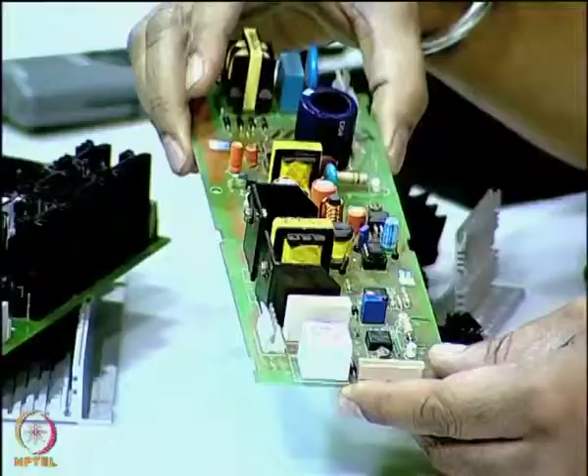If you look at the PCBs, many of the printed wiring boards which have power components in them will have some form of heat sinking done which will remove the heat from the components.

Look at this particular component. This is nothing but an aluminum plate which is bent in the shape of an L. Within, you will see the component here. This is a TO-220 package component mounted on the PCB. The leads are mounted on the PCB right here, and the body is affixed to this aluminum plate which will act as a heat sink. This is a very simple heat sink, but you have different varieties of heat sinks.

For example, take this particular board here, where the heat sinking is by extruded aluminum lengths. These are aluminum extrusions, and inside you will see the components placed. The three leads here which come out are those of the components, and these are used basically to keep the junction temperature of those particular power components cool.

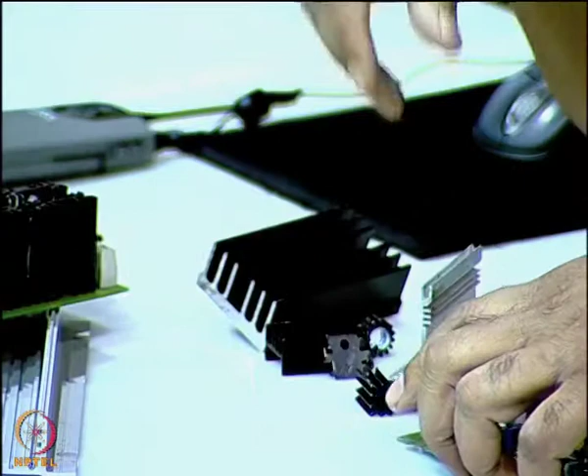You see another type of heat sinking here. Likewise, you have different shapes. You see there is another heat sink which is of a different cross section. This is also aluminum extrusion.

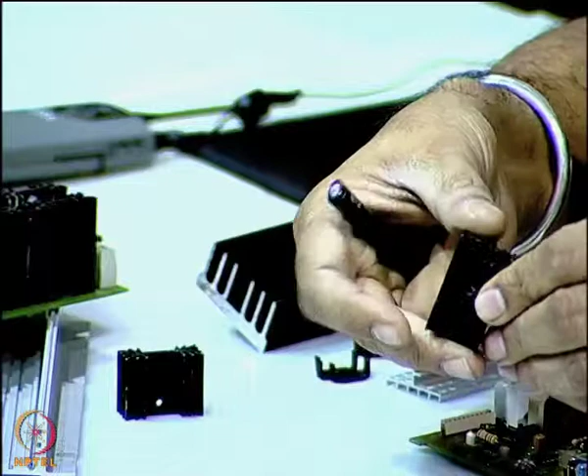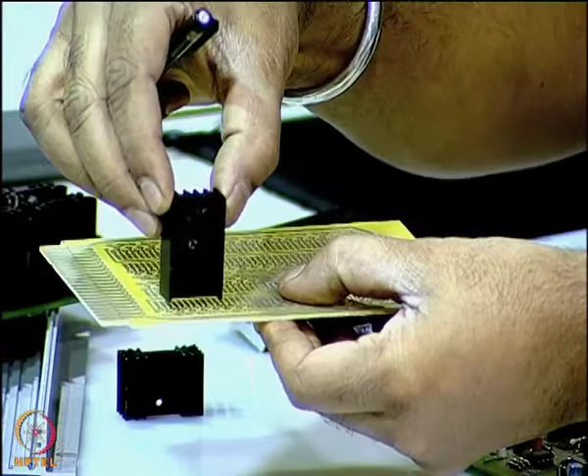Another PCB mountable heat sink. You have a possibility of attaching it to the printed wiring board through a screw, here a mounting hole. The component will be mounted here and onto the PCB, which will probably fit something like this. We mount it in this fashion with the component leads going into the PCB.

You also have this type of cylindrical cross section heat sinks. These are for the TO5 package type of devices which are circular, maybe op amps also, and some BJTs which have a circular cross section like that, and it is fixed around that, and mounted onto the PCB like that. So, like that you have many such heat sinks.

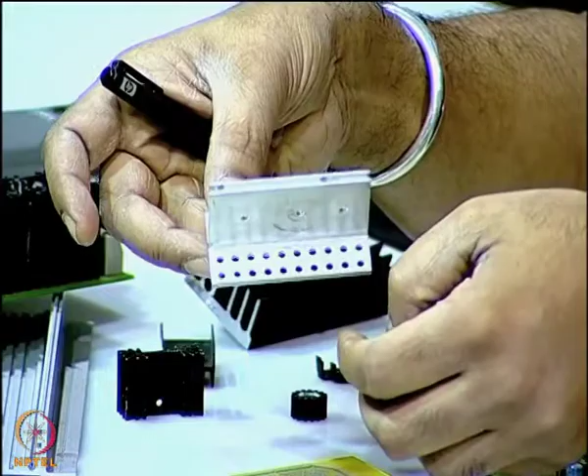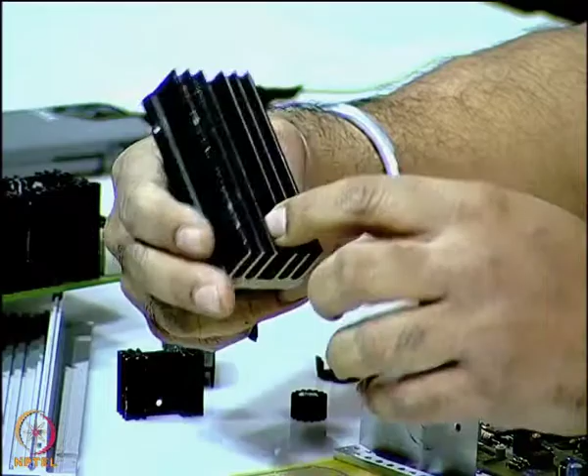This is another type of extrusion piece with components mounted through that. The leads will go in through these holes and onto the PCB. You have another type of a bit heavier heat sink with different cross section here. The components are mounted inside and fixed to the enclosure through these mounting holes. So, you have heat sinks of varying sizes, still further bigger ones, depending upon the type of heat that has to be removed from the junction.

So the culprit, of course, is where the heat source is actually at the semiconductor junction, and the semiconductor junction is the source of heat, which is coming as a consequence of current flowing through it and a potential across it.

And therefore, today's main discussion is on the thermal aspects. This is what we will be talking on, and the junction temperature in most of the semiconductor devices that you will be using would have an upper limit of 150 degrees centigrade. This is actually the breaking point. You should never go to that, and almost all the designs will see to it that the junction temperature is less than 120 degrees centigrade.

It should not go beyond that, even at an ambient temperature of 50 degrees centigrade. So, these are some numbers that you need to keep in mind, and normally the designs are performed for these extreme numbers.

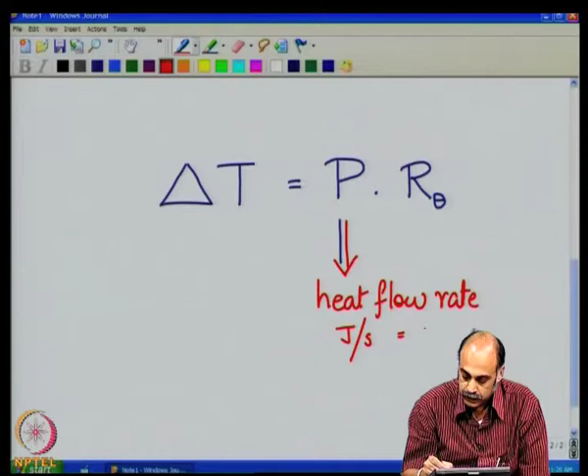So heat flow rate is nothing but the power dissipated within that particular component. And you have another parameter which comes here, which is the property of the material, and this is called the thermal resistance.

Thermal resistance is not actually the resistance like in the electrical sense. It is not a dissipator. It is only going to impede the flow of heat. It is a measure of the speed with which the heat can be conducted away, can be removed away from the hot source. So this is to be construed, this needs to be understood in that fashion. The thermal resistance here just means the speed at which the heat can be removed from the hot source.

Now this equation is the governing equation, and for electrical engineers they say that this is something equivalent to Ohm's law, as we know in electrical engineering, V which is equal to I into R, something similar to that, but not exactly the same.

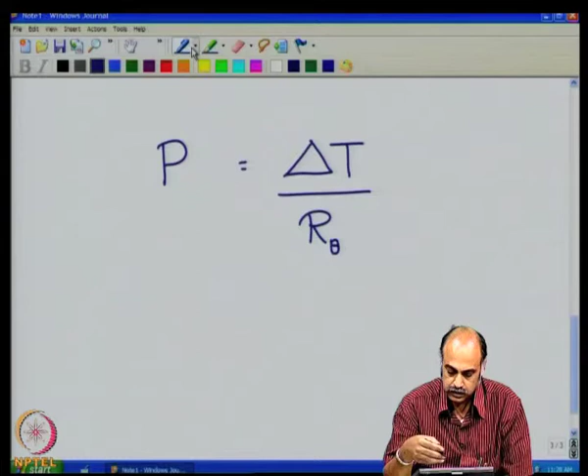Now this form is a very generic form, but there are many derived forms, and many literature give this law in different notations and different forms. In order to avoid confusion, let us have a look at the various notations that are there in the literature. They are actually the same thing expressed in a slightly different manner.

Now firstly, power sometimes is expressed with respect to unit cross section area, power per unit cross sectional area given in this fashion, A R theta. Now what is A? If you have a square block like this, a solid piece of block, and let us say this is the hotter side T H, this is the colder side T C, and the heat is flowing from this hotter side to the colder side in this fashion.

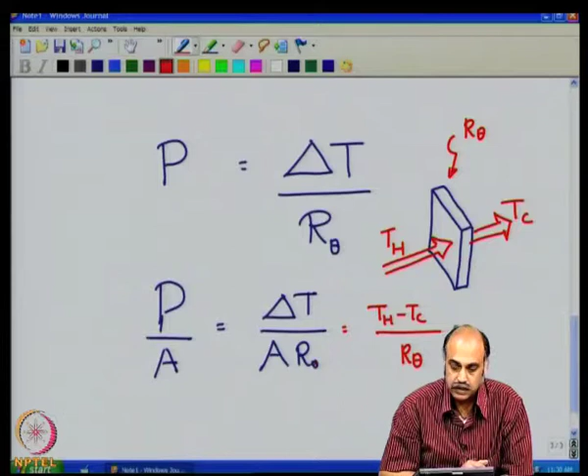So delta T is nothing but T H minus T C, and R thermal, which is the property of this material which is being used. It has an impedance which resists the flow of heat. Good conductors of electricity in many cases are good conductors of heat too. Now this particular solid, let us say, has a cross sectional area perpendicular to the heat flow, and that is A.

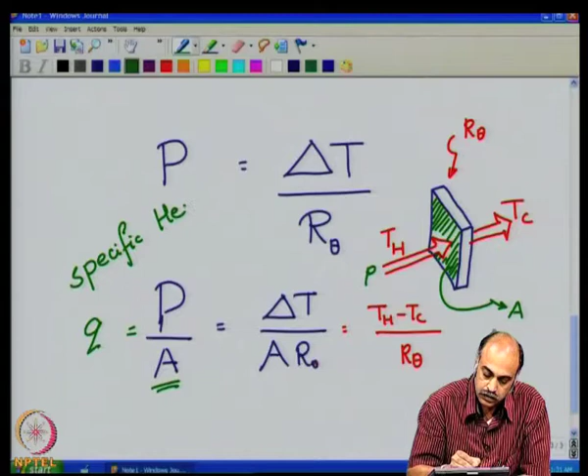Now that is the A that we are saying power by the cross sectional area is called Q. This is called specific heat flow rate. Q is nothing but the specific heat flow rate, watts per meter square, that is its units.

So this is one way of expressing P is equal to delta T by R theta. You have Q which is equal to P by A, which is equal to delta T by A R theta. Now this A R theta is given a different symbology in many literature, lowercase r theta. So it is written as delta T by r theta.

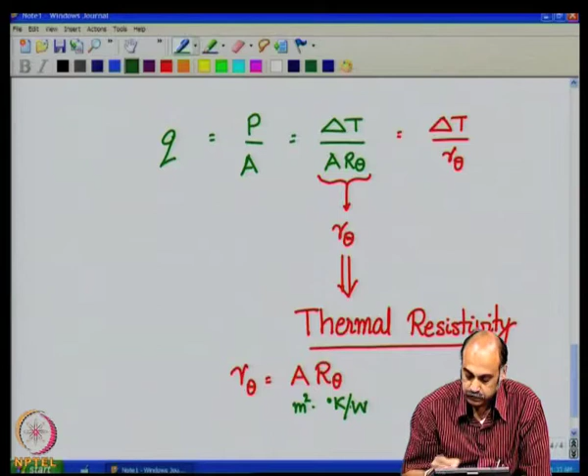Now what is this r theta? This is called thermal resistivity. So we had R, which is the thermal resistance, and you have lowercase r theta, which is called thermal resistivity, which is given by this relation A into thermal resistance. So you have the units for this, meter square into degree Kelvin per watt. So thermal resistivity is expressed in the units degree Kelvin meter square per watt.

Okay, so this is one way of looking at it. So what do we have? We have Q, the specific heat flow rate, which is given by heat flow rate by the area of cross section perpendicular to the heat flow, which is given by delta T by A R theta, which is given by delta T by lowercase r theta, called the thermal resistivity.

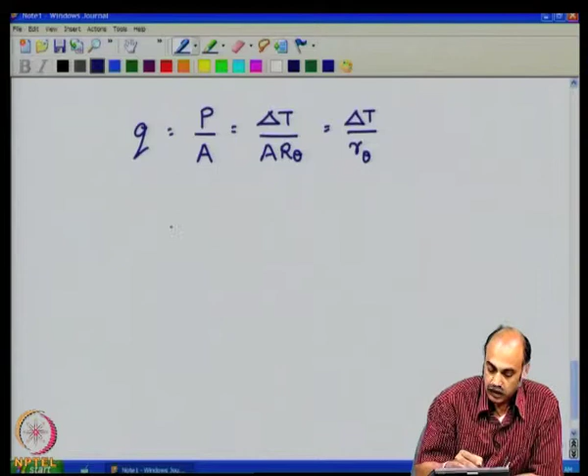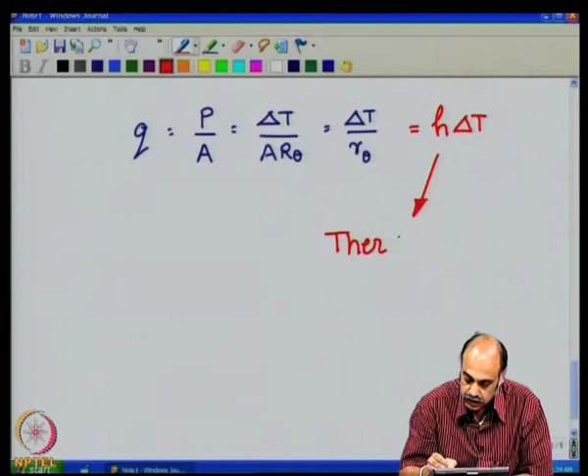Now to this there is a different notation, it is equal to H delta T. Now H is another constant used in many literature, and this is called the thermal coefficient.

H is called the thermal coefficient. It is nothing but 1 by lowercase r theta, 1 by thermal resistivity. We know that thermal resistivity has units of degree Kelvin meter square per watt. So thermal coefficient will be watt per degree Kelvin per meter square.

So this is another way of expressing the same heat flow equation relationship. There is one more way of expressing the heat flow relationship.

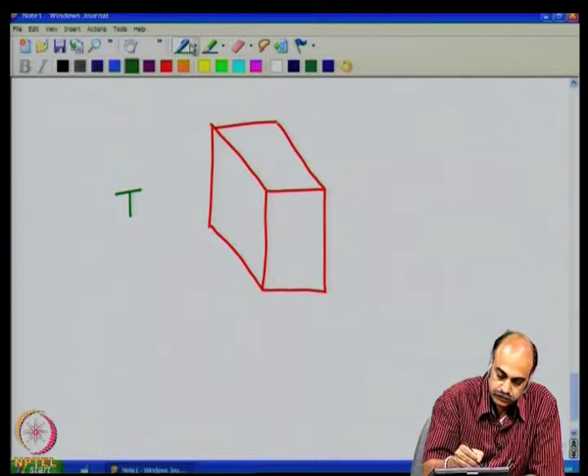Let us take up a similar kind of situation where you have a block, and this block has a temperature, we will call it T1, the hotter side, and heat flows in this fashion. The area of cross section perpendicular to the flow of heat, we shall call that as A, and the thickness of the block we will call it as delta x. Heat is flowing to the colder side, and we call that one T2.

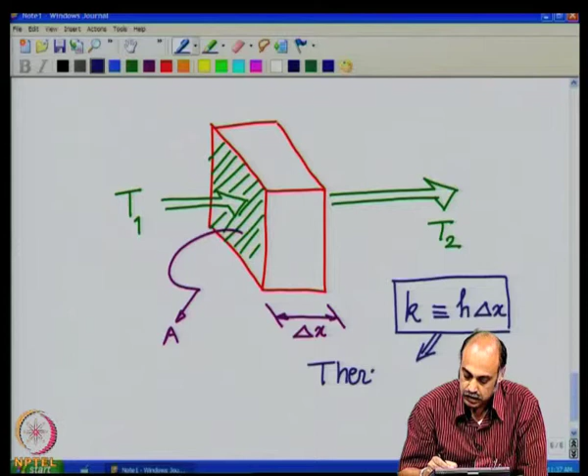Now the property of the block, which normally we express in terms of thermal resistance, thermal resistivity, or even the thermal coefficient H, we have one more constant K, which defines the property of the material, and this is defined in terms of thermal coefficient H and delta x. This is the definition, and this is called in the literature as thermal conductivity. This is also a very popular notation, thermal conductivity, which is used in many literature, and this in fact gives the nicely famous heat equation form.

So if you take the thermal conductivity K, which is expressed as H delta x, and we know that the units of H is watt per degree Kelvin per meter square, but there is a delta x in the numerator, so it will become per meter. So thermal conductivity has units of watt per degree Kelvin per meter.

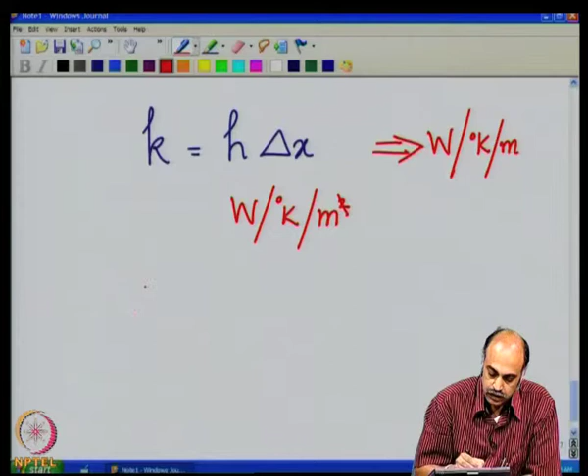So now going back to the equation, specific heat flow rate given by P by A, which is equal to H delta T, thermal coefficient into the temperature difference. Now this temperature difference is nothing but T1 minus T2 in the case we just described. And if you want to make use of this thermal conductivity equation, H can be written as K by delta x into delta T, and this is nothing but K delta T by delta x.

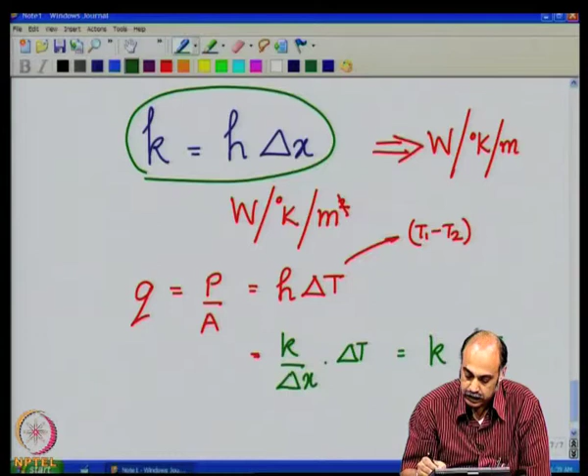And therefore you have Q, which is equal to P by A, which is equal to K delta T by delta x. So this is the famous heat flow equation, which is also written in this form to have a continuous temperature gradient with respect to the distance through the solid. So this is a very popular expression used in many literature.

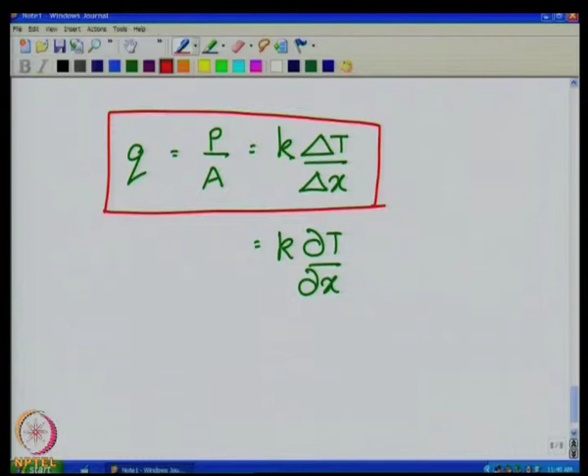So you should be aware of these things. You saw that the same notation was used in different forms. Let us just summarize so that you do not get confused at this point. We started with...

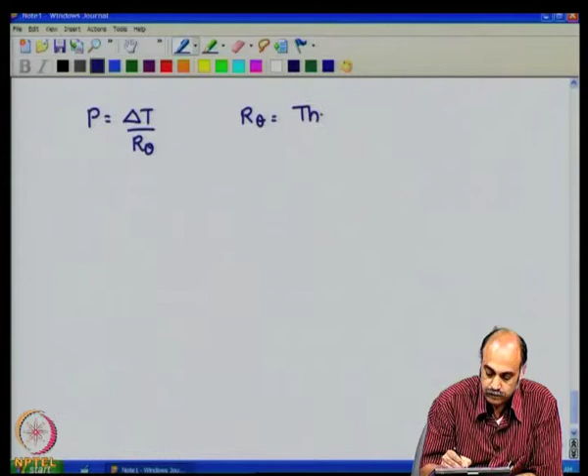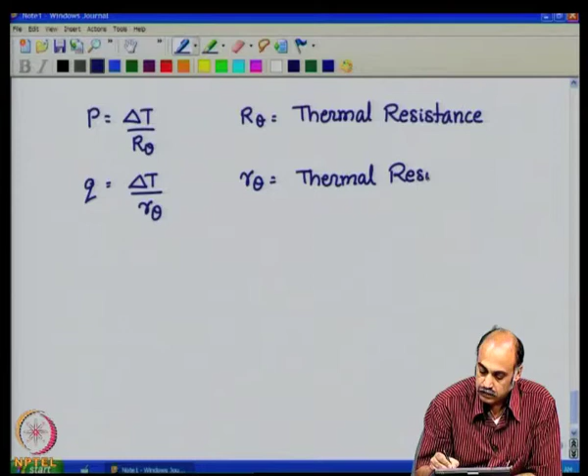P, which is equal to delta T by R thermal. Now this R thermal is called the thermal resistance. You have Q, which is equal to delta T by lowercase r theta, where r theta is the thermal resistivity. You have another form, Q, which is equal to H delta T, where H is called the thermal coefficient. And you had the other form, Q, which is equal to K delta T by delta x, where K is called the thermal conductivity. So these are the four forms that are very popular in the literature.

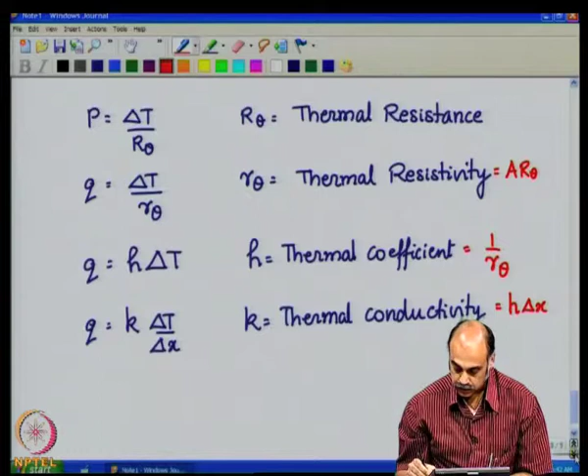You will see these forms are one and the same, except that the notations are slightly different, and you should not get confused when you see one of the forms. You can always convert one form to another. You see that this is nothing but A R theta, this is nothing but 1 by thermal resistivity, and this is nothing but thermal coefficient into delta x. So this is the basic relationship of heat flow rate, heat flow energy, temperature difference or temperature gradient, and the material property.

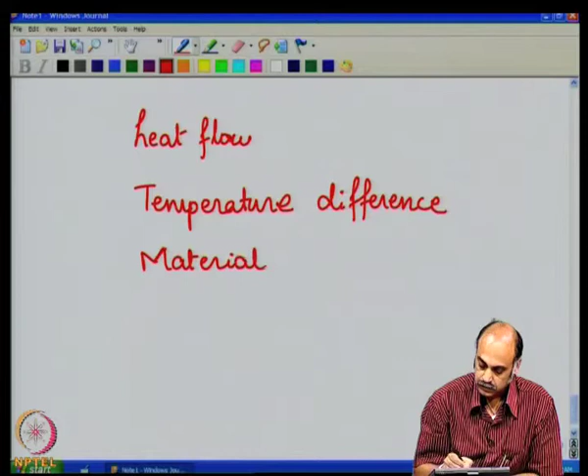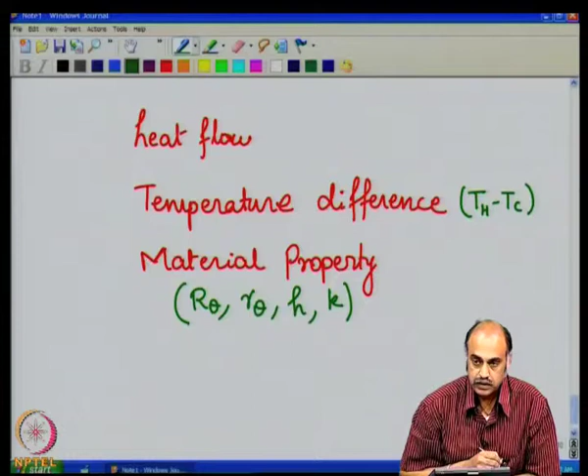So, the material property is the one which is actually represented by these thermal resistance, thermal resistivity, thermal conductivity and such. These are measurable quantities. This is the potential, temperature of the hot minus temperature of the cold, the two points where the heat flow occurs.

Now, the heat flow rate is nothing but the power flow, the power that is dissipated within the semiconductor. This power comes from the electrical circuit equivalent analysis. So, you know the currents flowing through the various components, you know the voltage across the various components, then you should be able to derive the power that is getting dissipated within the semiconductor junction, in the diodes, in the BJTs, in the MOSFETs, or within the ICs, or the magnetic components, or even in the capacitances and the inductances. Once you know the power that is dissipated, then it is a matter of getting it into the thermal domain and relating it with the material properties in this fashion.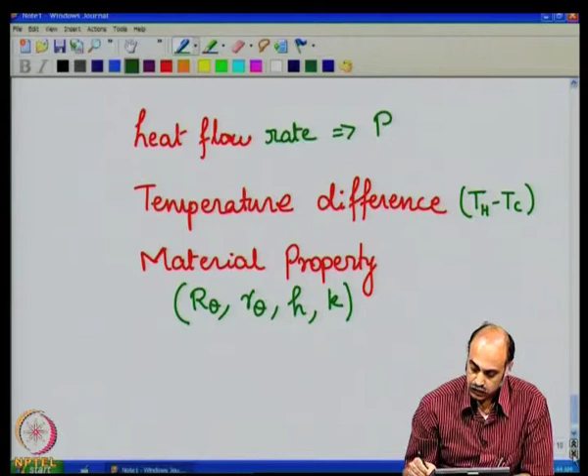So, heat removal methods. Our main motivation for this topic here now is that there is dissipation occurring within the components, and we want to remove the heat so that we can keep the junction of the components cool enough and working reliably.

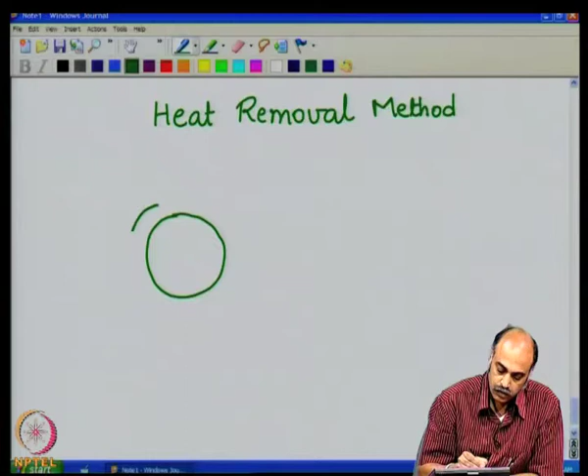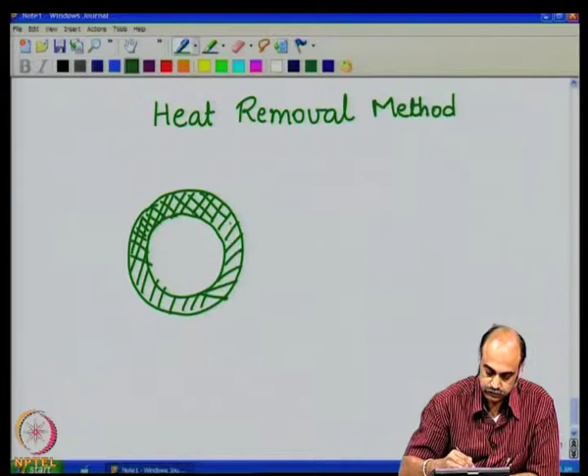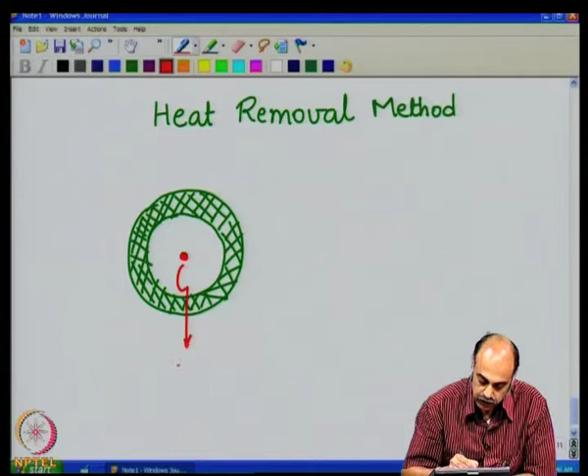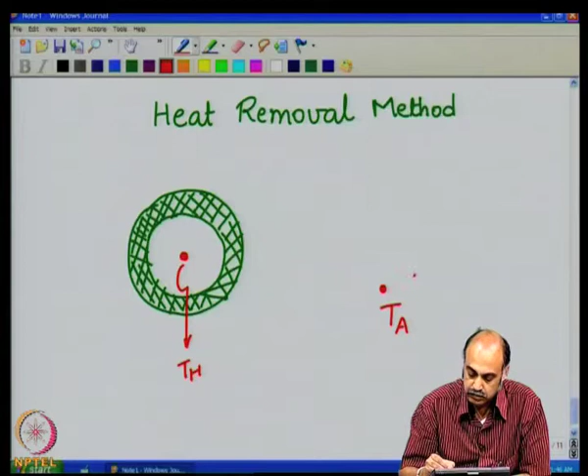If you take for example a closed space, having an enclosure, a solid enclosure as shown like this, and this solid enclosure contains a hot spot shown in red, and that is the highest temperature point in this system, let us say TH. Now, this heat source should ultimately get conducted to the ambient. Let us say this is TA, ambient. Let us say the ambient is around 50 degree centigrade, and this is much greater, around 120 degree centigrade.

Now, what all can happen? The heat energy needs to reach the inner surface of the solid, and it can reach in all directions. The inner surface of this particular enclosure is at some temperature, T surface inner, and the heat is to be conducted from this inner surface to the outer surface, in all directions. So, I am showing these wiggly arrows to indicate the heat flow, and the temperature at the outer surface we will call TSO, T surface outer temperature.

And from this outer temperature, the heat is supposed to go out to the ambient in all directions. So, this is the typical way the heat flow happens.

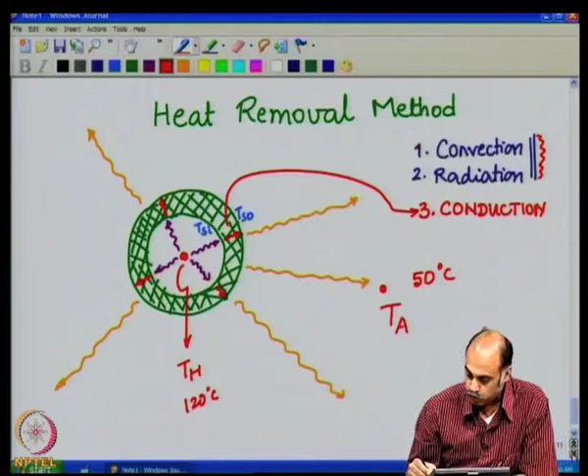So, we do not have too many methods to deal with. You have just 3 plus 1, I will say what is that plus 1. Heat flow within solids, we call it conduction.

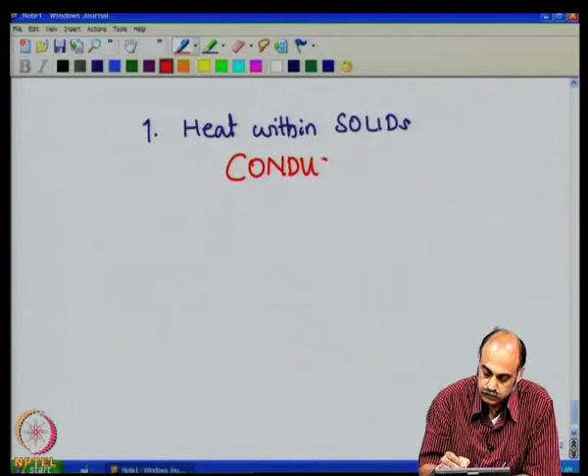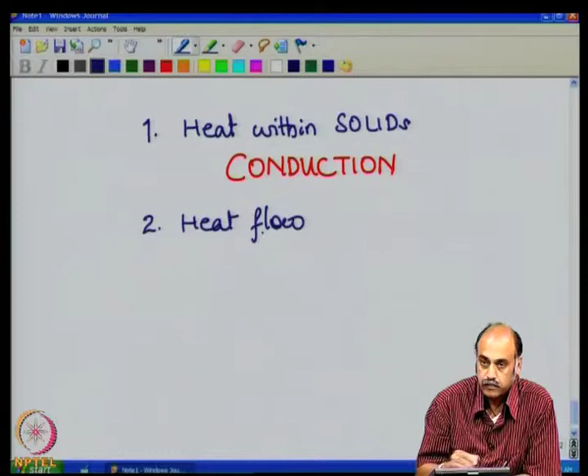Heat flow at the solid fluid interface, we call it convection. So, for convection you need to have a fluid which is interfacing with the solid, so that the fluid is the actual medium which is removing or conducting the heat away.

And the third method, heat flow without a medium, through radiation, this is called radiation.

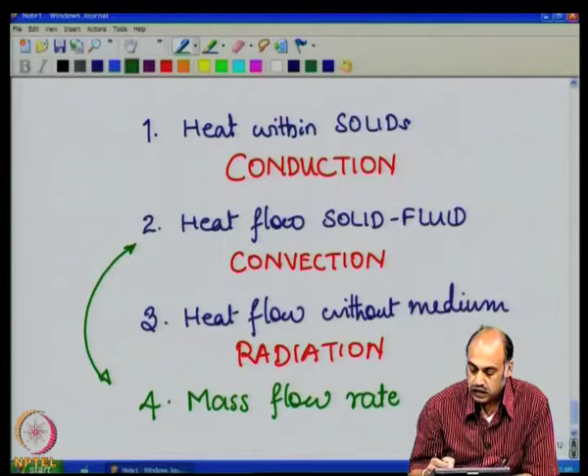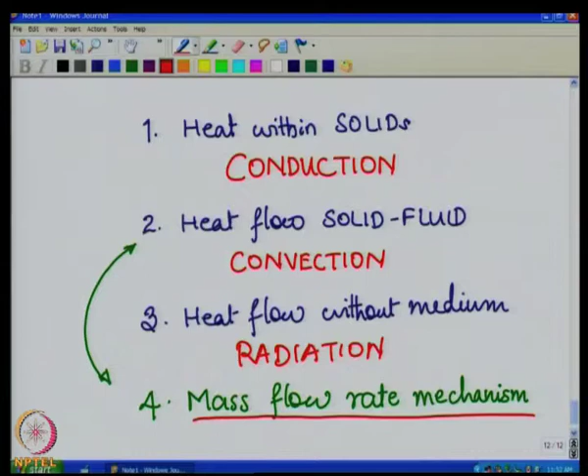There is one more method, I shall put that one in green. It is also in some way linked with convection. It is also a solid fluid interface. This is called mass flow rate, heat transfer through the mass flow rate mechanism. In convection, the fluid flow is not tightly controlled or regulated, whereas in the mass flow rate mechanism the fluid flow is tightly regulated, and therefore you have this as a separate mechanism, part of the convection mechanism, and we call that one the mass flow rate mechanism.

So, these are the 4 basic types of methods that are used for conducting the heat away from the junction. So, now coming to the methods by which you try to remove the heat away.

Let me show some scenarios which will give you the basic idea. Probably first a simple explanation with conduction.

So let us take an example where we are trying to conduct the heat from the semiconductor to the ambient. Let us say we have some solid material where this portion is the hot portion, at temperature Th, and this portion is the cold portion, at temperature Tc. The heat will flow from the hot to the cold in this manner.

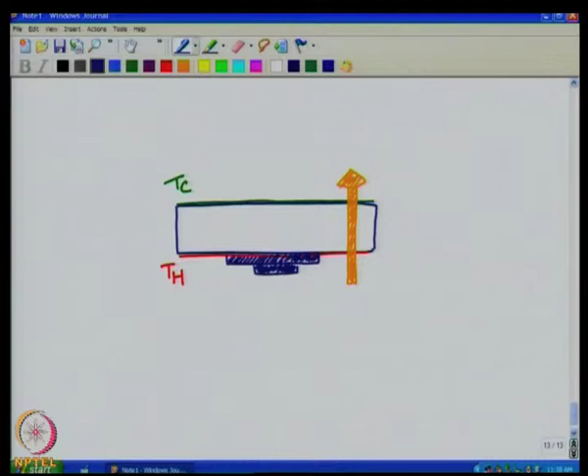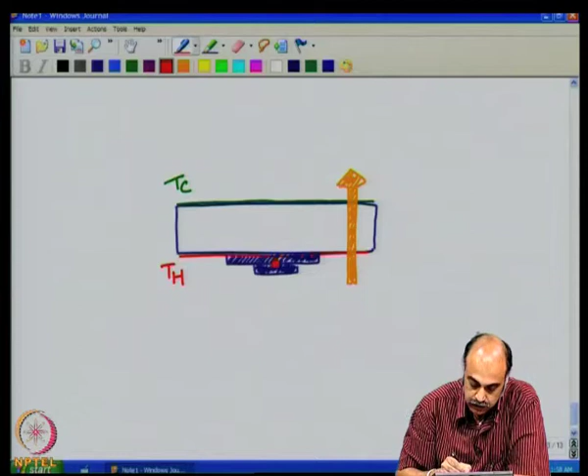Now if you look at these components here in this PCB, you see that this component is fixed to this aluminum plate here. So the hot spot is within this component at the junction, and that has to be removed out to the ambient. So here this component has a hot spot right in, and that is called the junction temperature Tj.

Now let me erase this portion, these symbols, and make way for new symbols. The heat flows from the junction, the hot spot, to the case, the surrounding case. The surrounding case, the blue colored one, is at temperature Tc, which is lower than the junction.

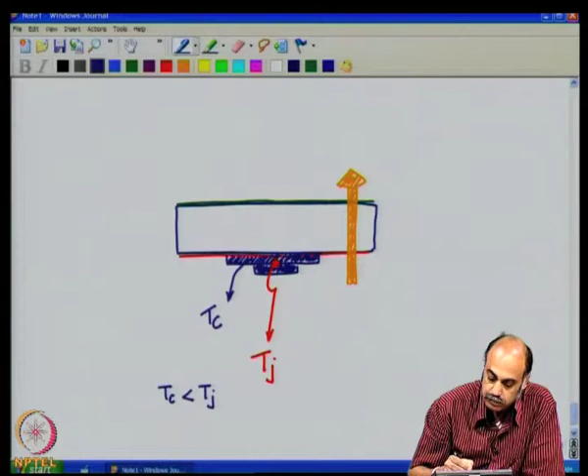And from there the power flows on to the heat sink, which is the bottom portion of the heat sink as shown here. Now there is a temperature gradient. You will see that heat starts flowing from the bottom to the top as shown.

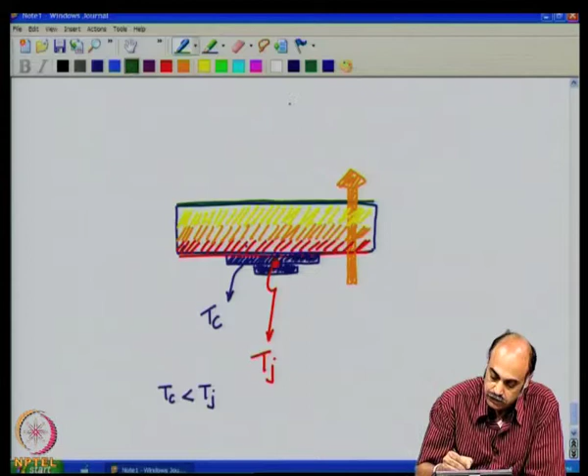And somewhere here we will say is the ambient, which is at around 50 degrees centigrade. So the junction is at around 120 degrees centigrade, and we want the heat to flow in this fashion.

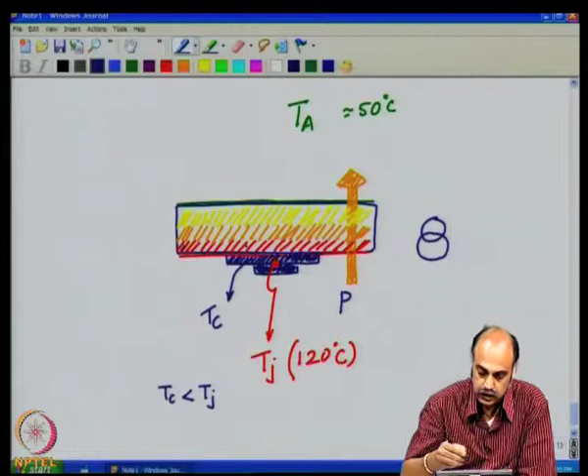Now how do we model this? The power flow P is modeled as a current source like this. I will reposition things in a slightly different way. It is modeled as a power source like that.

Now this power source is basically the dissipation which is happening within the junction. The power source generated at the junction is at junction temperature with respect to ambient, T amb.

Now there is a thermal resistance between junction and the case. So this is the junction, this is the case, and this results in a temperature Tc at the case, slightly lesser, due to the presence of a thermal resistance R theta junction to case, R theta Jc, let us say.

Then from the case, the component is attached to the aluminum block or heat sink block through a compound called heat sink compound, which is supposed to make proper contact with the surface of the heat sink. So that also is going to bring about a thermal impedance from case to sink, giving rise to another thermal resistance, case to sink.

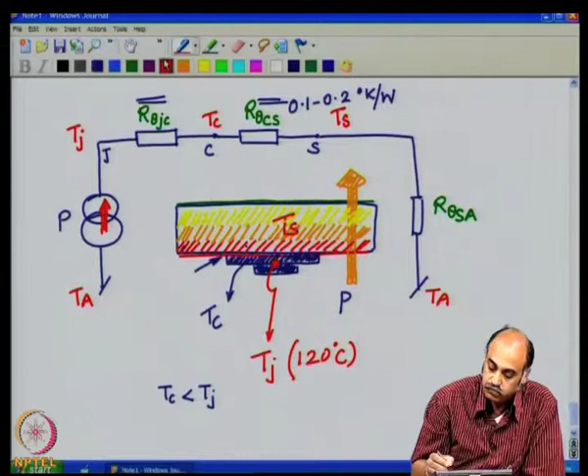Generally, we need to find out what this is, so that you can buy from the market a suitable heat sink of suitable extrusion and cross section, such that the R thermal sink to ambient is as required.

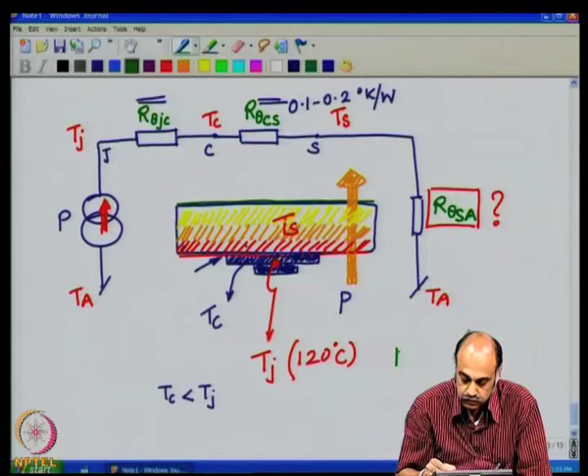So what is the governing equation? We know that P equals delta T by R thermal. This is our basic governing equation.

Now let us reframe this equation in this following manner: R thermal is equal to delta T by P, or we should say delta T is nothing but Tj, junction temperature, minus TA, the ambient temperature, divided by P.

Is the total thermal resistance which you see in this whole link from Tj to TA. So what is it? That is equal to R theta junction to case plus R theta case to sink plus R theta sink to ambient.

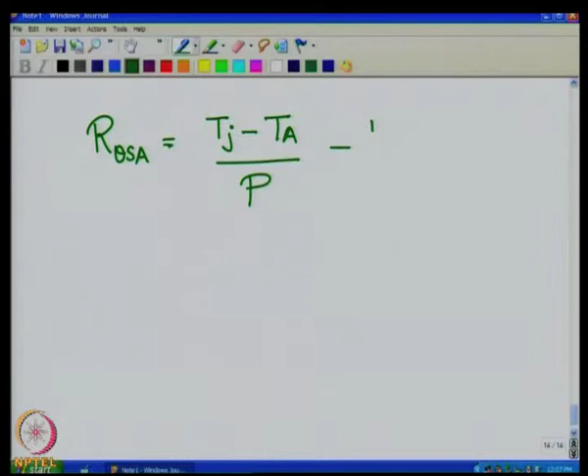So, this can be rewritten in the following manner: R theta sink to ambient. This is what you normally would need to buy from the market, given by T junction temperature minus T ambient temperature, divided by the heat power flow rate, minus R theta junction to case, minus R theta case to sink. This would be the governing equation by which you go and buy a particular heat sink.

So, T j is the junction temperature, and for most semiconductors it is 150 degrees centigrade max, and normally we do not allow it to go more than 120 degrees centigrade.

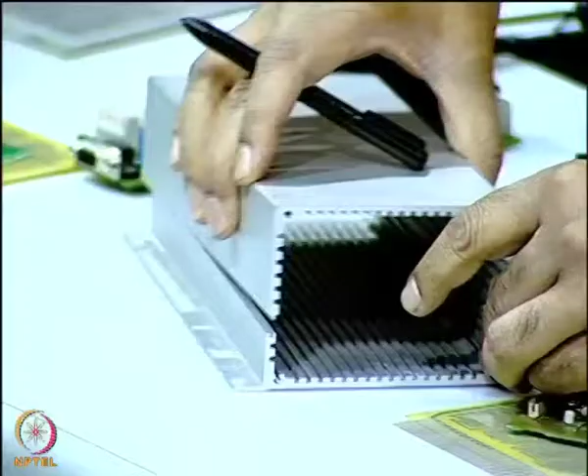T ambient, this is not the room temperature. Keep that in mind, this is not the room temperature. This is the temperature in the immediate neighborhood of the heat sink. So, if you have an enclosure like this, let us say you have an enclosure, and this heat sink, this particular card is supposed to fit into this enclosure like this. Let me fix this. So, let us say this is going to fit like this. It is not, T A does not mean the temperature of the room surrounding this enclosure. It is the temperature in the immediate neighborhood of the component of the heat sink within the enclosure, which will be at a higher temperature than the room temperature when all these enclosures are closed and packed.

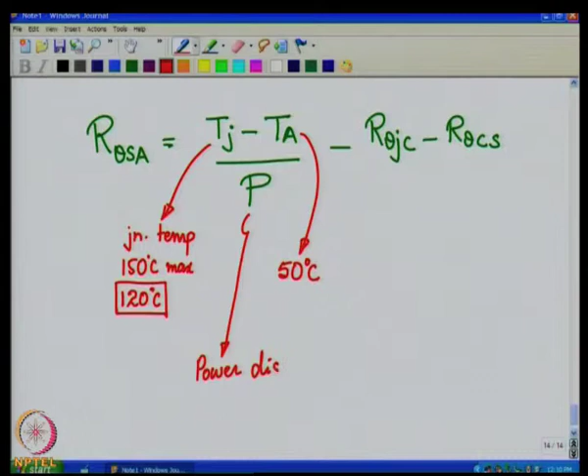So, this is the temperature which should normally be designed for around 50 degrees centigrade, much higher than the room temperature, and this P is the power dissipation within the component. This is calculated from circuit analysis.

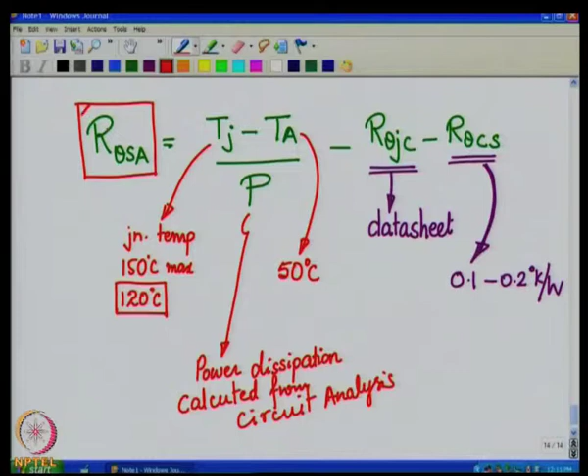This portion, R theta junction to case, for that specific component, you can get from the data sheet of the component. The electrical data sheet will give R theta junction to case. This depends upon the quality of the contact made by the component with the heat sink, and it varies by around 0.1 to 0.2 degree Kelvin per watt. So, knowing all this, one can calculate this and from the market get the heat sink according to the thermal resistance requirement of sink to ambient, and connect it to the component.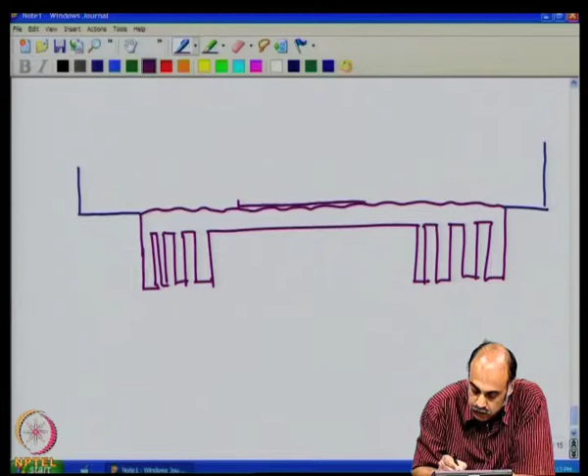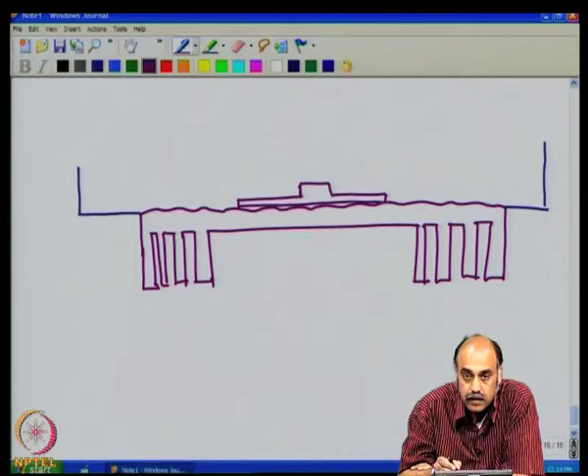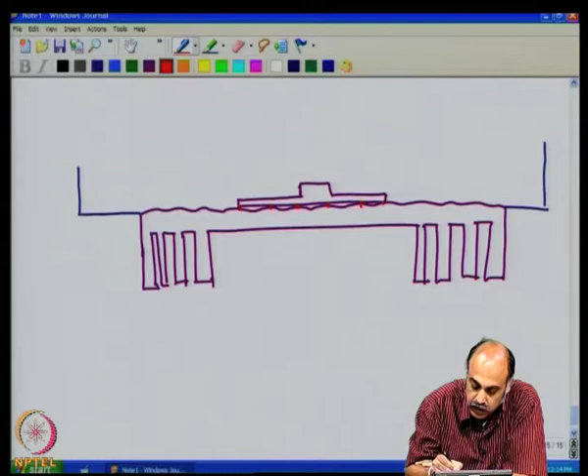Now, what is crucial is if you zoom in to the surface here, let me remove that. The surface is not actually smooth, it is very jagged. So, this is an extremely zoomed case, and on that if you mount the component, you will see that these micro hills will actually make point contact. It will only make point contact with the component, and therefore the contact will not be good, and as a result R theta CS will deteriorate, meaning thermal resistance will become high.

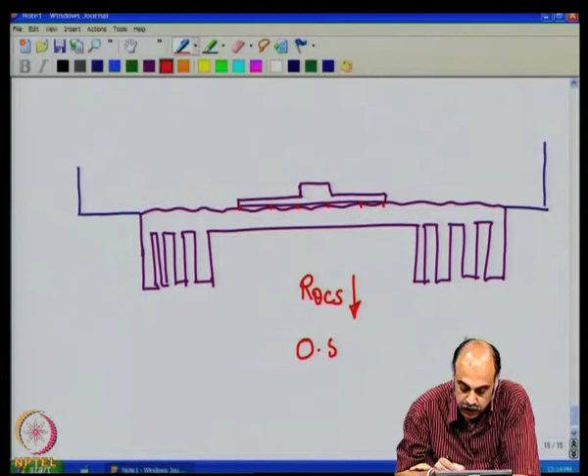It can go even as high as between 0.5 degree Kelvin per watt to 1.5 degree Kelvin per watt. This is a poorly fixed component to the heat sink.

Therefore, what is normally done to improve the contact is one has to apply a paste which just fills these valleys within the hills. You should not apply too much paste, otherwise you will have a thick layer of paste above the valleys, and again it will deteriorate the contact thermal resistance. You have to apply just enough paste to fill the valleys and make very good contact between the component and the heat sink. These valleys are filled with a paste called heat sink compound, which is a thermally conductive paste.

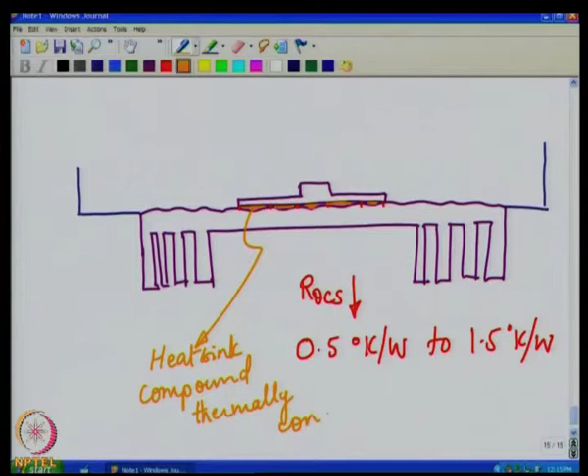And that has to be done, it is mandatory if you have to get a good case to sink thermal resistance. So, this is the way that the components will be mounted and the heat sink will be used for removing the heat.

In power electronic components, you should note there is one more issue. The heat that can normally be removed by a natural process, without forcing the fluid flow, is limited, and therefore we may have to apply forced cooling in some high power equipments, in which case fans are used.

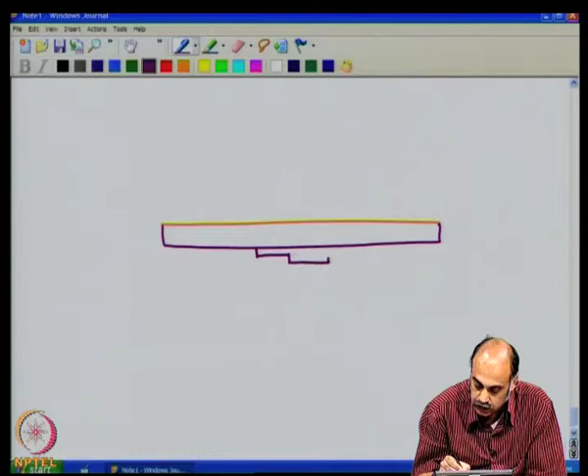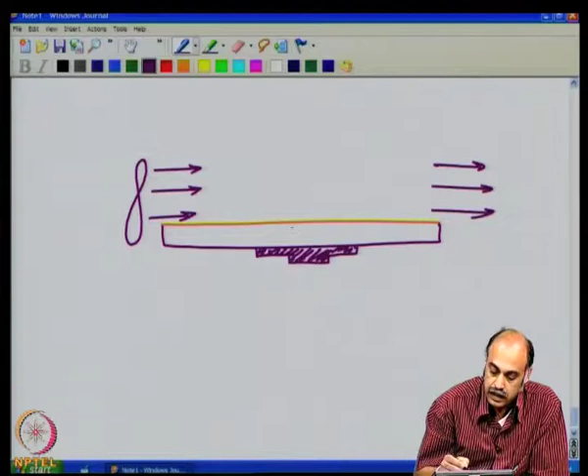So, you must note that if you have a heat sink surface like this, let me show it as a surface like this, and let us say you have mounted a component in this fashion. A fan is also mounted, which will give forced airflow through the top of the surface, and this forced air cooling will give much better thermal resistance. It will lower the thermal resistance drastically and remove the heat away from this component, with the hot spot here, at a much more rapid rate.

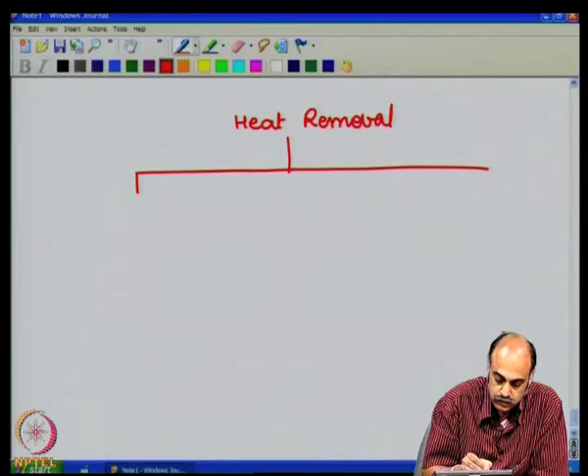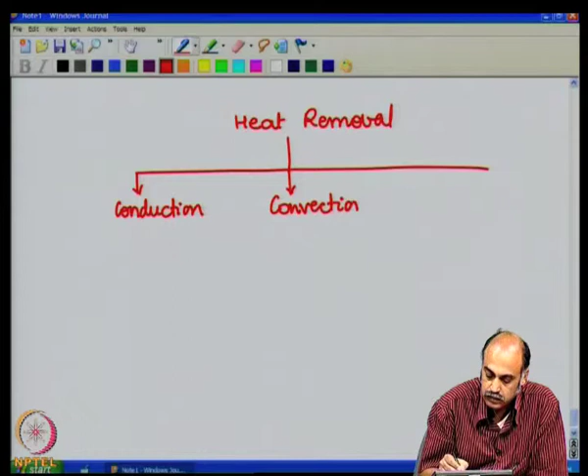So, if you see in the hierarchy, the heat removal methods can be classified like this: you have conduction, you have convection, and you have radiation.

Now, we saw the relationship in the case of conduction, where the specific heat flow rate is given by K delta T by delta X. Similar such relationships are there even in convection and radiation. However, it is out of the scope of this particular class.

However, know that there are two methods in which you bring about convection. One is natural convection, and the other, of course, is forced convection. In natural convection, there is no fan incorporated into the enclosure. The density of the air changes as it becomes hot, it will rise up and cooler air comes down, and there is a fluid cycle due to the natural density gradient which will occur.

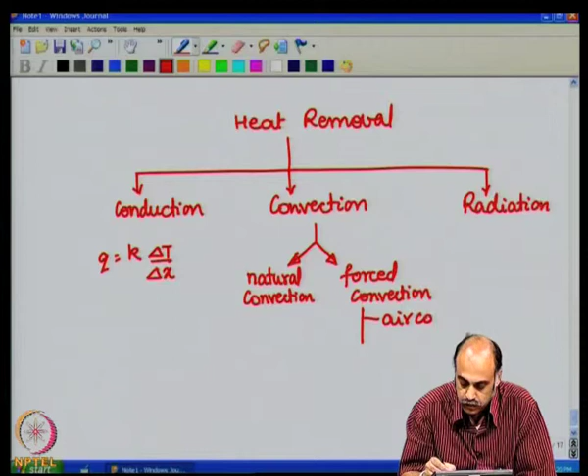Forced convection is, as I mentioned just now, through the application of forced cooling, either forced air cooling or forced liquid cooling. Liquid cooling is much lower in thermal resistance.

The thermal resistance of convection is best obtained by experimentation. Even though models are available using Nusselt's number, Rayleigh number and the Reynolds number for fluid flow, one can arrive at a mathematical model and estimate the value. However, in most cases you will find that the estimates are off by more than 50%, 50 to 100%. Therefore, it is better to experimentally find out the thermal resistance in this case, and so also the thermal resistance for radiation can be estimated. However, it is right now out of the scope of this particular class.

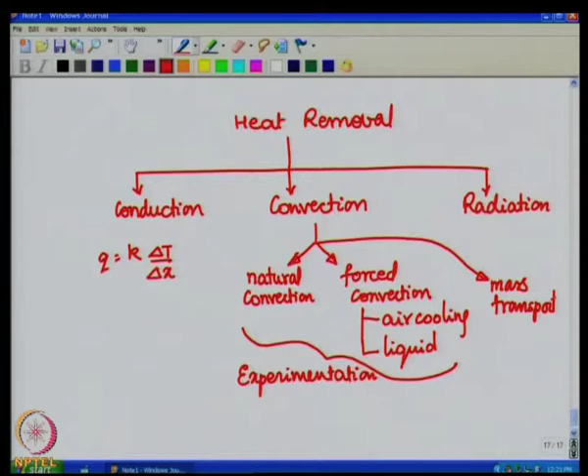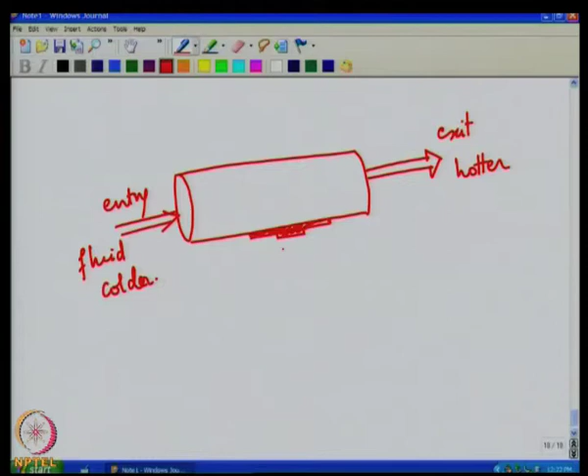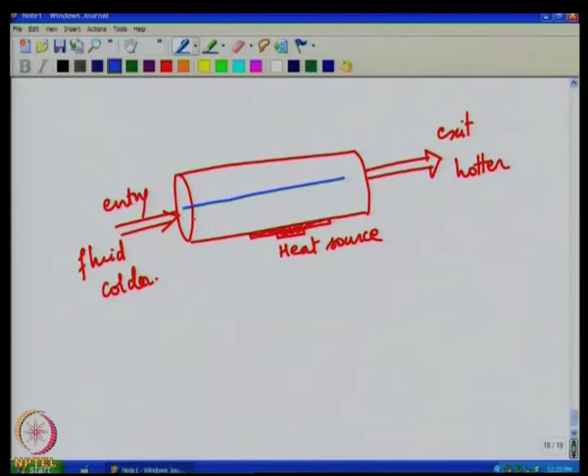Apart from this, as I said, we have one more method which falls similar to convection, which is mass transport. So in mass transport, what is actually done is you have, let us say, a pipe, and the fluid, which could be oil or water, is allowed to flow through this pipe. It enters at lower temperature, exits at hotter temperature, and the heat source is here in between. This is the hot body, and the fluid flow within the pipe is controlled, the controlled flow rate, and that power is given by the mass flow rate into Cp into delta T.

If let us say this is T1 and this is T2, this delta T is nothing but T2 minus T1. So, the amount of heat that is conducted away, taken away from this heat source, is given by the mass flow rate of the fluid. Cp is called the specific heat of the particular fluid, and the temperature difference. And by far, the mass flow rate can give you some of the least thermal resistance and can conduct away the heat at a very good rate.

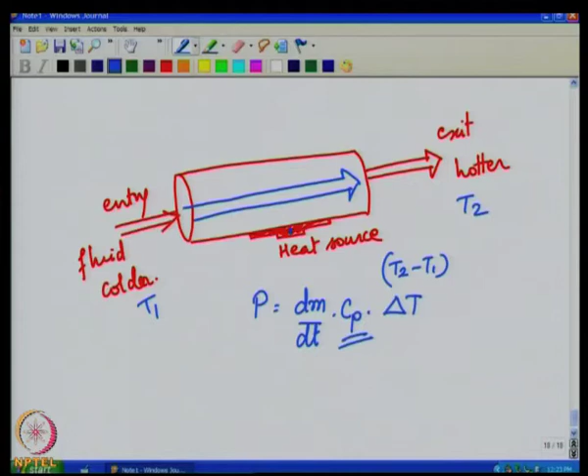So, these are some of the methods that we have seen, and this is just a basic class on the thermal aspects, which was used to sensitize you to the problems involved in thermal aspects and how heat is removed away to the ambient. It is very crucial that this has to be done, and the proper functioning of the whole enclosure, the whole equipment and the printed wiring board depends upon the goodness with which you are able to remove the heat away from the junction. Thank you.